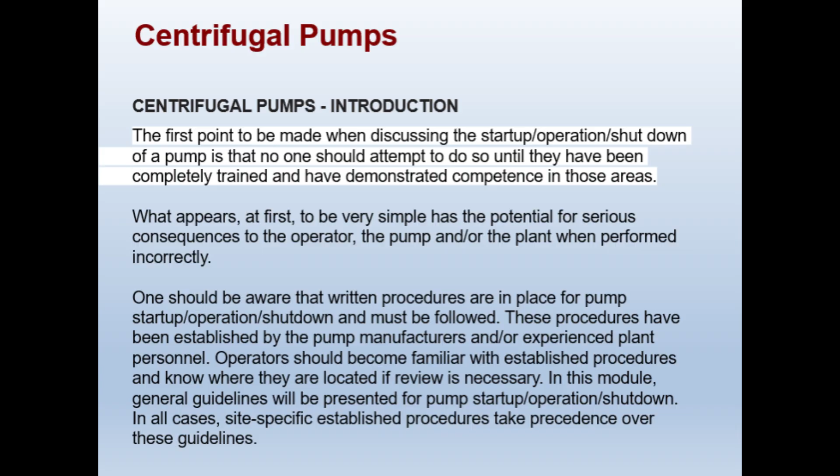Before starting any pump, an operator must understand certain aspects of its installation. Questions such as whether static suction lift exists, what liquid is being pumped, and where it is being delivered should all be answered well before startup.

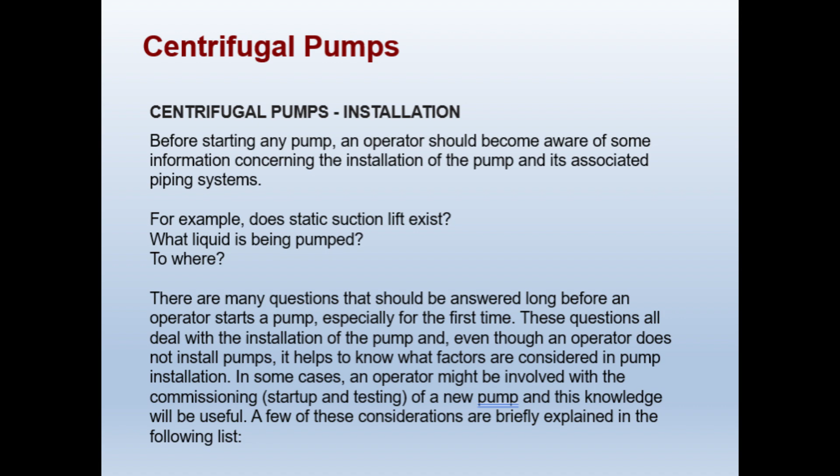Even though operators typically do not install pumps themselves, understanding the installation factors is valuable, especially if you're involved in commissioning a new pump. Let us walk through some of the key considerations that influence how a pump is installed and configured. When a new pump arrives at the plant, it undergoes careful inspection for any damage from shipping.

This is an excellent opportunity for operators to begin familiarizing themselves with the equipment. Key questions to consider include the pump's purpose and installation location, whether it is single-stage or multi-stage, whether it uses mechanical seals, and how the bearing housing is lubricated. Operators should also identify how the pump will be driven and review all nameplate information and accompanying documentation. The answers to these questions build the foundation of equipment knowledge that every competent operator needs.

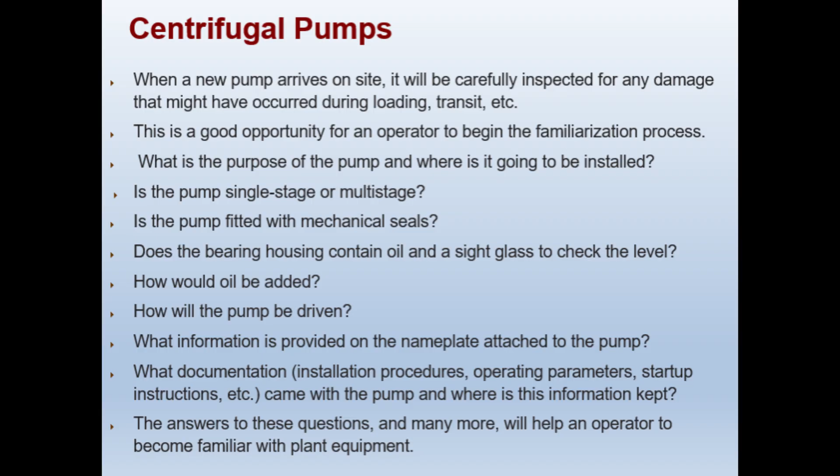During the physical installation of the pump, operators should observe as much as possible. Pay attention to how the pump is secured to its base to prevent future vibration problems. If an electric motor is being installed on site, watch the alignment process between the pump shaft and motor shaft. Note whether a flexible coupling is used to connect them. These observations help you understand the mechanical setup and will be valuable when troubleshooting issues later on.

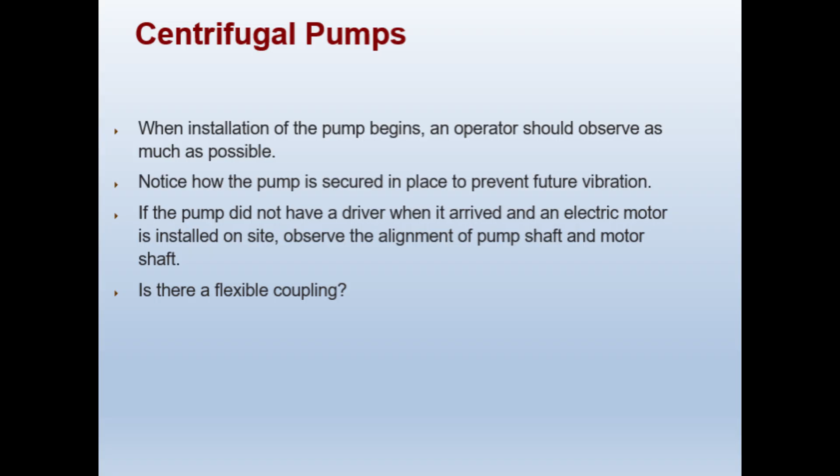Once the electrical connections are made, several important details need your attention. Look for an indication on the pump casing showing the correct rotational direction. If the motor spins the pump backwards during the initial jog test, the electrician will need to correct the wiring. Take note of the motor speed, voltage rating, and other nameplate information.

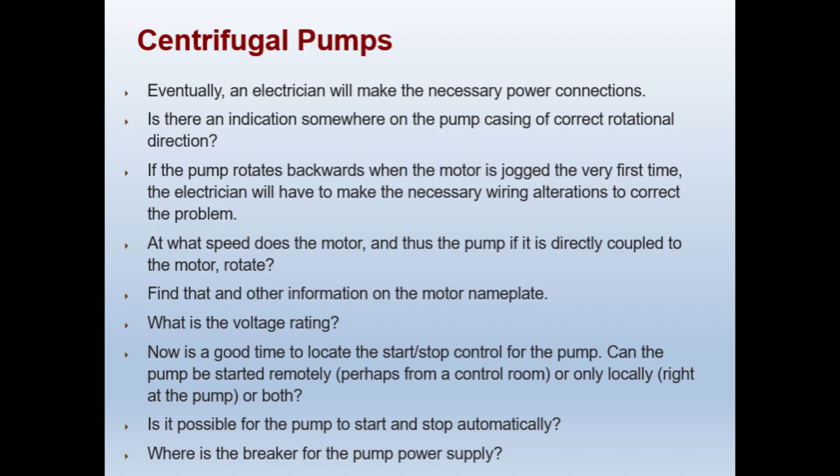Locate the start and stop controls and determine whether the pump can be started locally, remotely from a control room, or both. Also identify where the main breaker for the pump power supply is located and whether automatic start and stop capability exists. Observing the piping installation is equally important.

All connections, whether welded, screwed, or flanged, must be made without placing any strain on the pump body. The piping must be independently supported so the pump does not bear any of its weight, as this could lead to vibration, premature bearing wear, and seal damage.

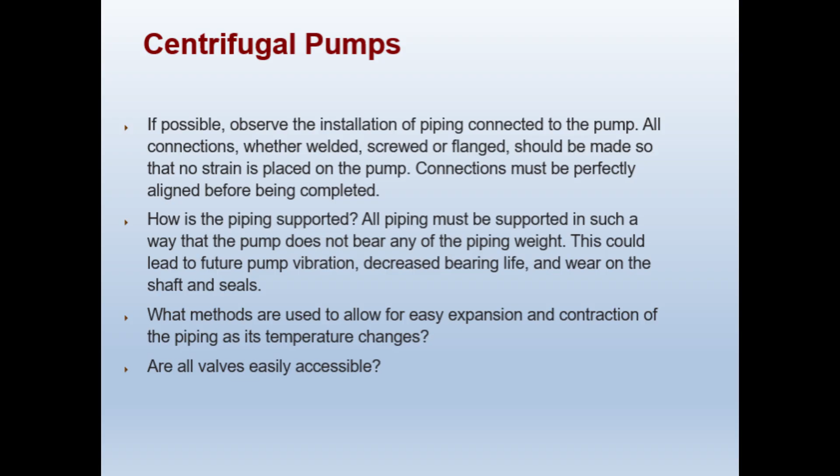Notice what methods are used to accommodate thermal expansion and contraction of the piping, and verify that all valves are easily accessible for operation and maintenance.

Now, let us look at the fittings installed in the piping system. Identify whether there is a suction valve at the pump, a valve in the discharge piping, and what types of valves are used. Are they quick opening or slow opening? Do they have rising spindles? Check for a check valve in the discharge piping and a strainer in the suction piping. Understanding all of these components is essential because they directly influence the procedures for starting, operating, and shutting down the pump.

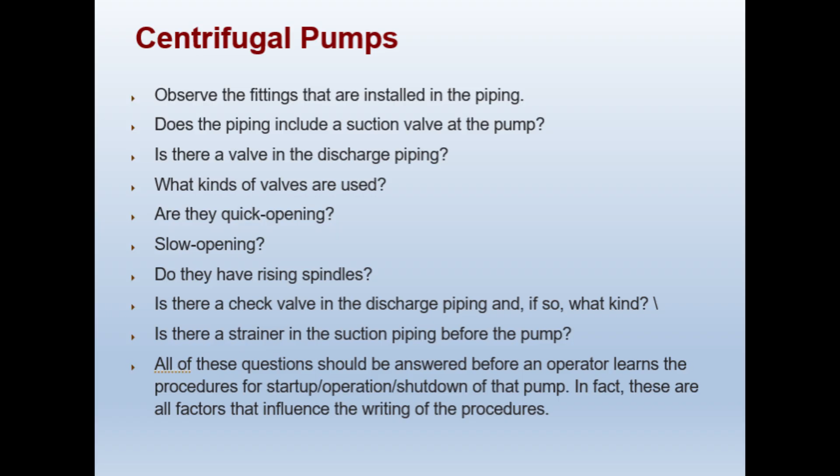Instrumentation around the pump provides critical operational data. Check for pressure gauges on both the suction and discharge sides of the pump, as well as gauges on either side of the suction strainer. A high differential pressure across the strainer indicates it is becoming plugged.

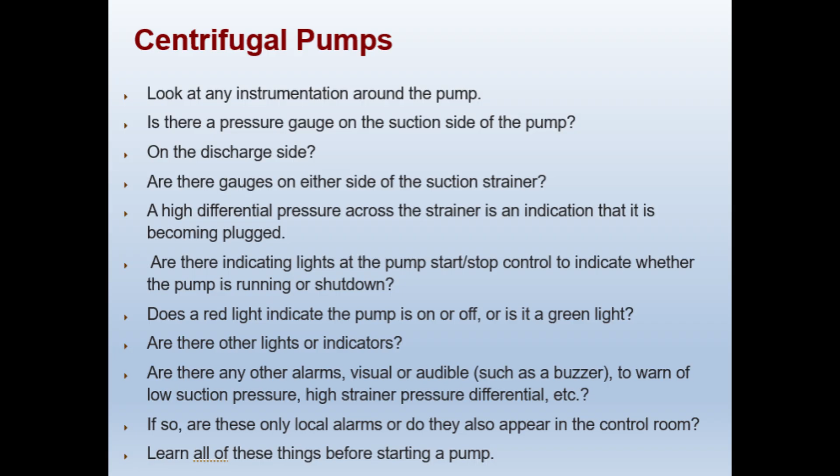Identify the indicating lights at the pump controls and learn what each color signifies. Determine whether alarms for conditions like low suction pressure are local only or also displayed in the control room. Learn all of these details before you ever start a pump. If you encounter any fittings, devices, or instrumentation that you do not recognize, make a note of them and find out what they are before operating the pump.

This knowledge could prevent serious consequences in the future. Also, if you identify any safety concerns that have not been addressed, such as a missing coupling guard, report them to your supervisor immediately. A coupling guard is a requirement, but it might have been overlooked.

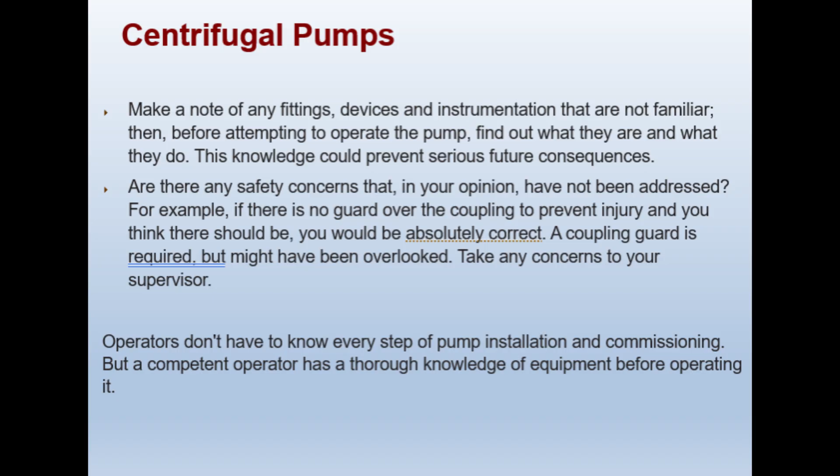Operators may not need to know every step of pump installation, but a competent operator always has thorough knowledge of equipment before operating it. Now we move into pre-startup checks.

Whether a pump has just been installed and commissioned or has been in service for years, certain checks must always be performed before starting. Never assume that any piece of equipment is ready to start without carefully inspecting it first. Because there are many variables to consider, the information presented here serves as a guideline only. There is absolutely no substitute for operator competence and adherence to plant-specific procedures.

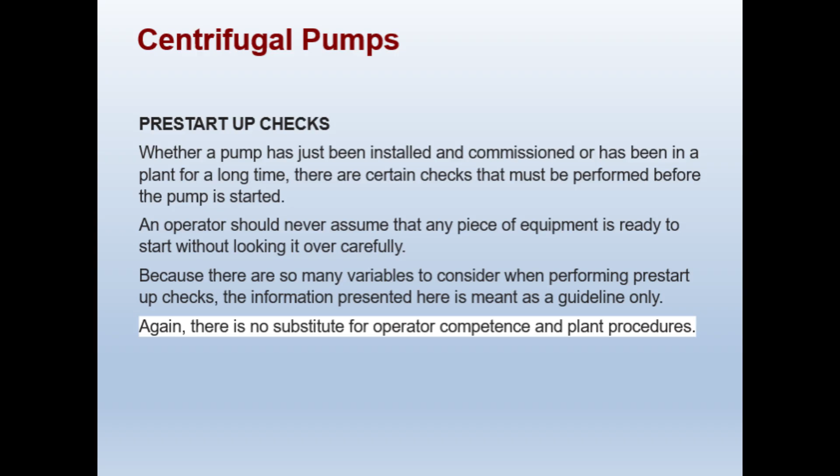The very first step of any pre-startup check is to confirm you are at the correct location. This may sound obvious, but poor communication can easily lead to serious mistakes, such as starting the wrong pump. If you are told to start P1 and there are multiple pumps with that designation, always ask for clarification.

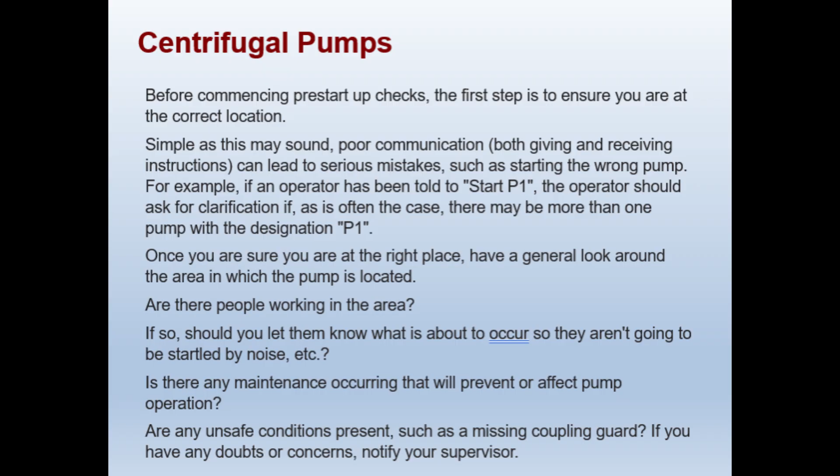Once you have confirmed you are at the right pump, survey the surrounding area. Are there people working nearby who should be notified? Is any maintenance in progress that could affect operation? Are there any unsafe conditions, such as a missing coupling guard? If you have any doubts, notify your supervisor.

Here is an example of a pre-startup procedure for a pump handling non-toxic, non-flammable liquids. First, verify that the liquid supply is available. For instance, check that the supply vessel level is above the required minimum. Never assume liquid is available.

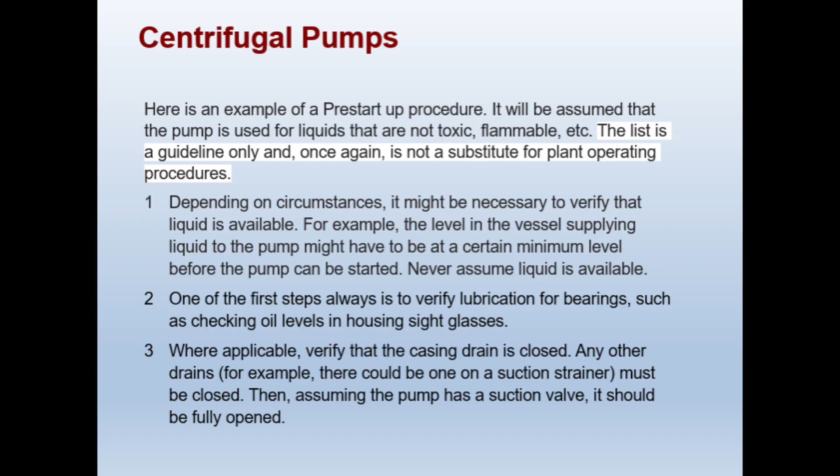Next, check bearing lubrication by verifying oil levels in the housing sight glasses. Ensure all drains are closed, including the casing drain and any strainer drains. Then, fully open the suction valve. These steps establish the basic conditions needed before the pump can be started.

It is standard practice to start a centrifugal pump with the discharge valve closed. This limits the electric current drawn by the motor at startup, which protects and prolongs the motor's life.

In our procedure, we also assume that a check valve is installed in the discharge piping immediately downstream of the pump before the discharge valve. If the discharge piping is already pressurized from other pumps feeding into the same system, the discharge valve could be opened before startup. However, for this procedure, we will start with the discharge valve closed.

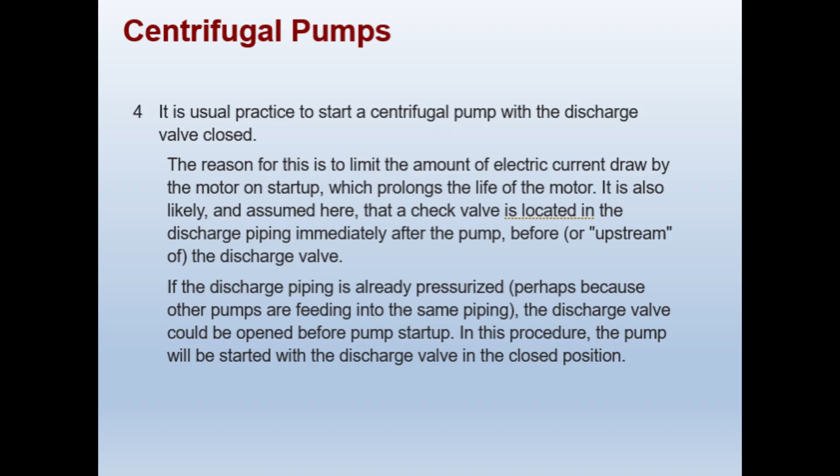Ensuring that the pump casing is full of liquid, known as priming, is critically important. Starting a pump without liquid in the casing can damage packing or mechanical seals because they depend on the pumped liquid for cooling and lubrication.

There are several methods for priming, depending on the piping configuration. When static suction head exists, as shown in the upcoming diagram, priming is accomplished by opening the vent valve at the top of the casing with the suction valve open. Liquid forces air out through the vent, and the vent valve is closed once liquid appears. Always verify that the suction pressure gauge reads normal pre-startup pressure.

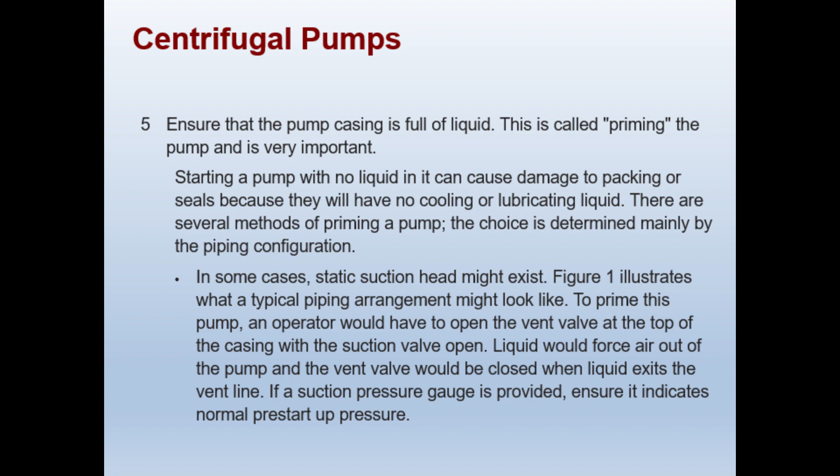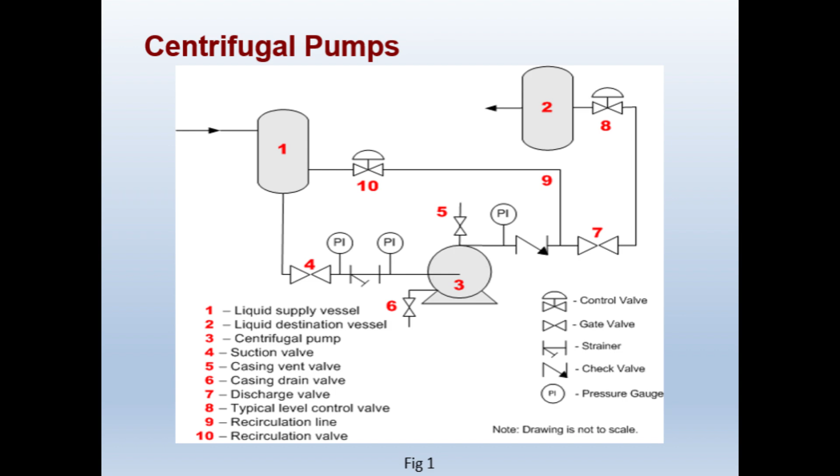Some pumps require a recirculation or minimum flow line. This piping connects the discharge side of the pump, upstream of the discharge valve, back to the liquid source. When the flow rate through the pump drops below a specified minimum, perhaps because a downstream control valve is closing, the recirculation valve opens automatically. This additional flow path prevents the pump from overheating, which would occur if low flow continued for an extended period. Understanding how this system works is vital for safe pump operation.

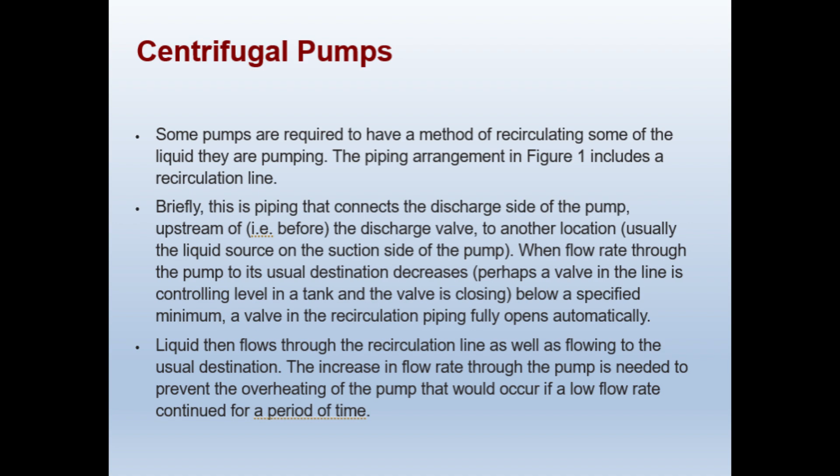To summarize the recirculation concept, it is essential to maintain a minimum flow of liquid through a centrifugal pump at all times to prevent overheating of internal components. That is why the recirculation line is often called the minimum flow line.

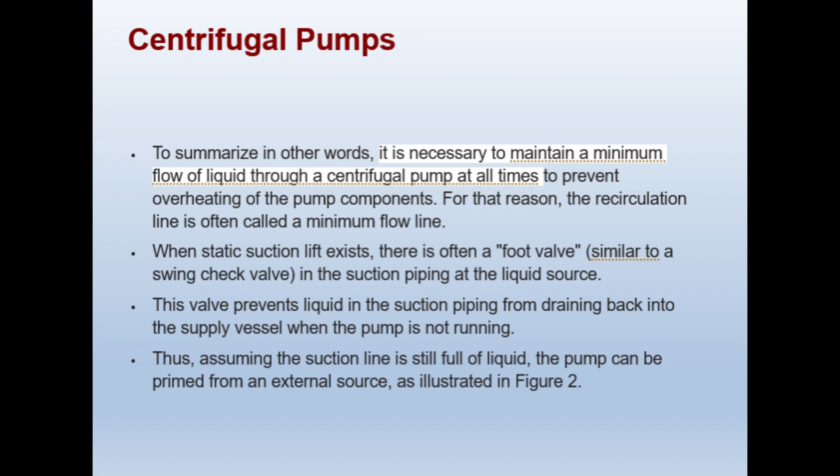Additionally, when static suction lift exists, a foot valve in the suction piping prevents liquid from draining back into the supply vessel when the pump is not running. If the suction line remains full of liquid, the pump can be primed from an external source, as we will see in the next diagram.

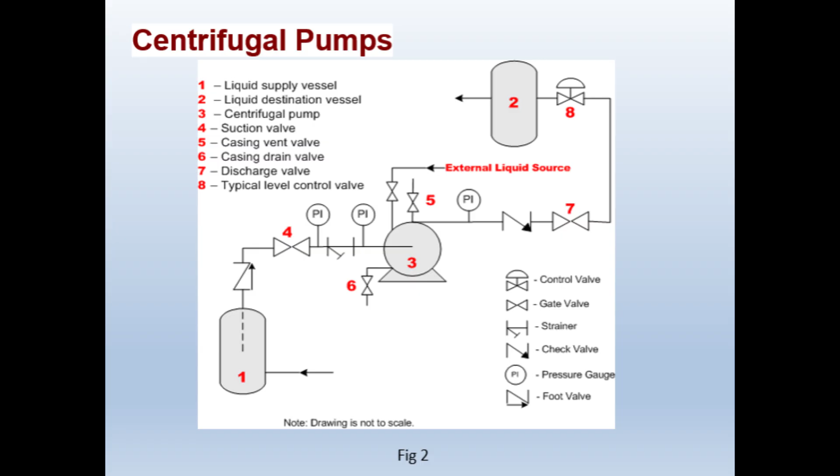This diagram shows how a pump can be primed from an external source when static suction lift exists and a foot valve is installed. The external priming source fills the pump casing with liquid, displacing the air through the vent. Once liquid exits the vent, the valve is closed and the pump is ready for startup. This method is particularly useful when the normal suction path cannot provide the initial prime on its own.

Each priming method has its place depending on the specific piping arrangement and plant configuration, and operators should be familiar with the method used for each pump they operate.

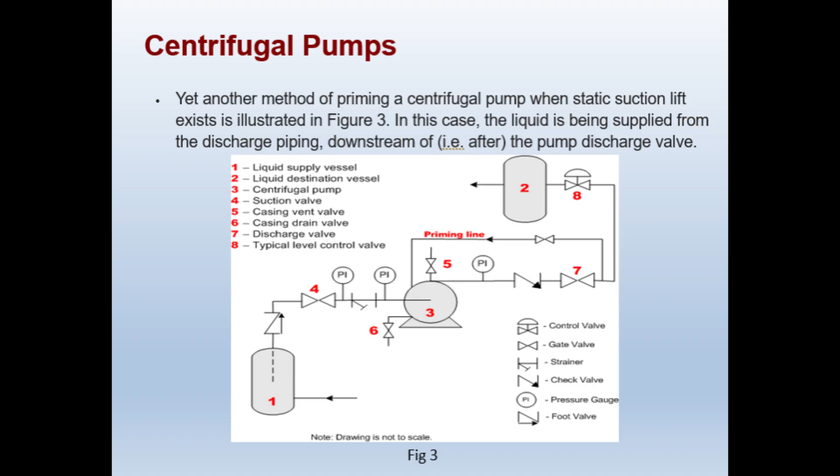A less commonly used priming method involves a small priming pump, which may even be hand-operated. This priming pump exhausts air from the casing, creating a low-pressure environment inside. When the casing pressure drops sufficiently, atmospheric pressure acting on the liquid in the supply vessel pushes liquid up into the casing. Once liquid exits the casing vent, the vent is closed, the priming pump is stopped, and the centrifugal pump can be started. The next slide illustrates this configuration.

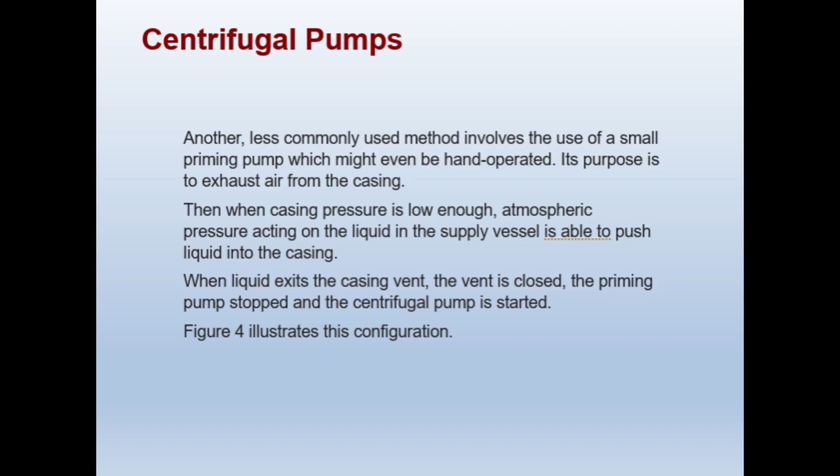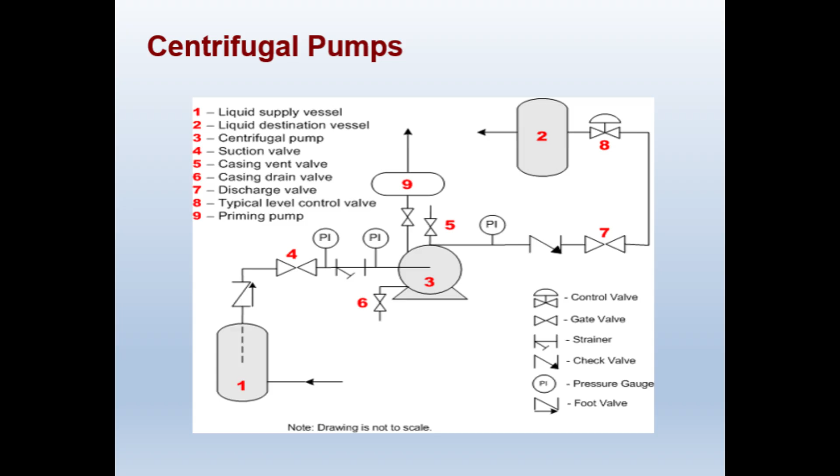Two additional pre-startup items deserve attention. First, if the pump uses an external source of liquid for packing or mechanical seal cooling and lubrication, verify that this supply is flowing before you start the pump. Running seals without their cooling liquid can cause rapid damage.

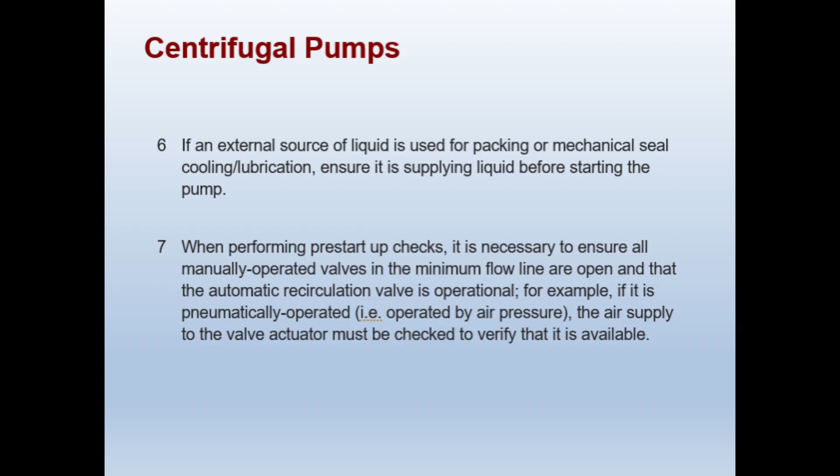Second, ensure that all manually operated valves in the minimum flow line are open and that the automatic recirculation valve is operational. If the recirculation valve is pneumatically operated, confirm that the air supply to the valve actuator is available.

Now we are ready to start the pump. When all pre-startup checks are complete, start the pump driver. If anything unusual occurs, such as severe vibration, shut the pump down immediately.

If the pump is operating satisfactorily, slowly open the discharge valve to its fully open position. Opening the valve too quickly can cause a hydraulic shock to the piping system, potentially causing damage.

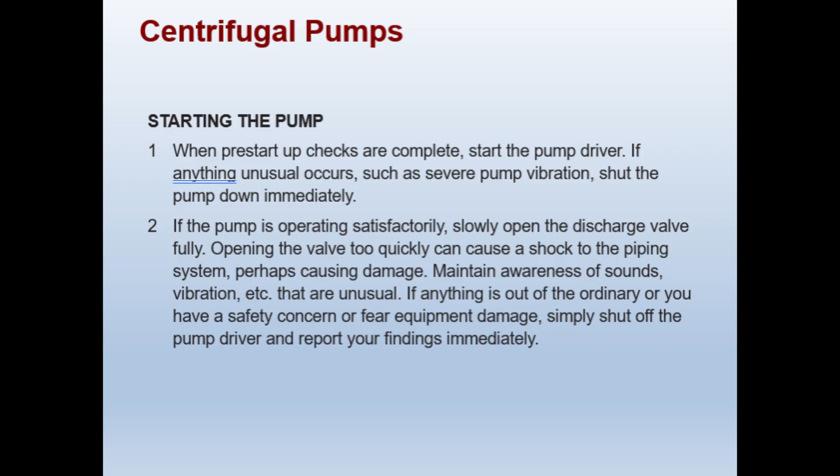Throughout this process, stay alert for any unusual sounds, vibration, or other abnormalities. If anything seems out of the ordinary or you have a safety concern, shut off the pump and report your findings immediately. After starting the pump and opening the discharge valve, observe the discharge pressure gauge and verify that it indicates normal operational pressure.

This confirms the pump is generating the expected head. Also check carefully for leaks around the pump. Keep in mind that seals, especially new ones, may leak slightly more right after startup, but this should decrease within a few minutes. If packing is used to seal the shaft rather than mechanical seals, a small amount of visible leakage is actually expected and necessary for proper packing function.

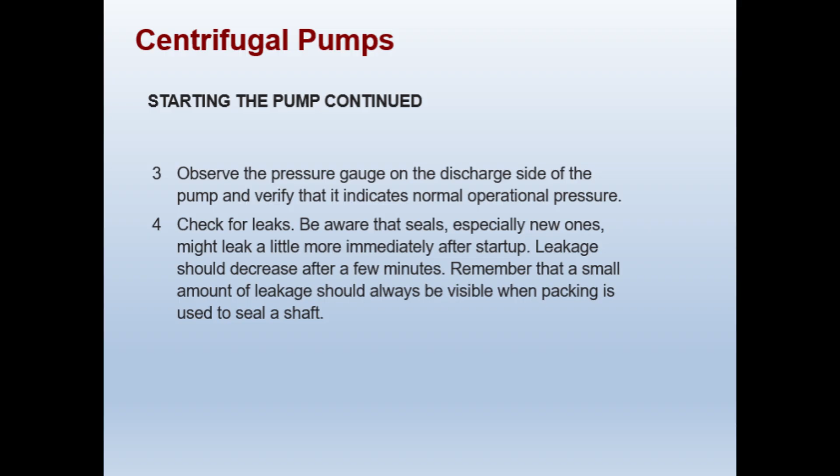Let us now discuss routine operating checks. An operator should never assume that once a pump appears to be running normally, there is no need to return and check on it. In fact, routine checks should be more frequent for pumps that have recently been placed in service. These checks are neither time-consuming nor difficult, but they must be thorough, more than simply walking past a pump to confirm it is still running.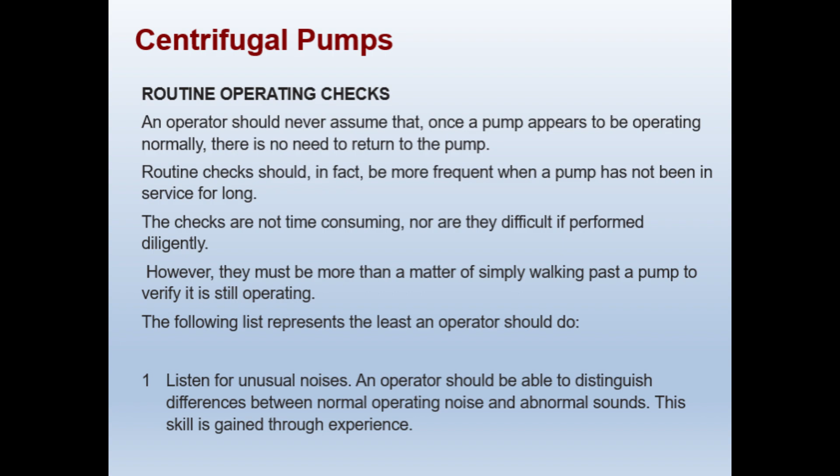At a minimum, listen for unusual noises. Experienced operators develop the ability to distinguish between normal operating sounds and abnormal ones. This skill comes with time and attention.

Continuing with routine checks, review all instrumentation associated with the pump. Is discharge pressure normal? Is suction pressure within the expected range? Check additional instruments monitoring flow rate, temperatures, strainer differential pressure, and any other relevant variables.

Remember that vibration can be transmitted from the pump through the attached piping, so unusual vibration heard at a distance may originate at the pump. Whenever possible, carefully feel the bearings to check for vibration and temperature.

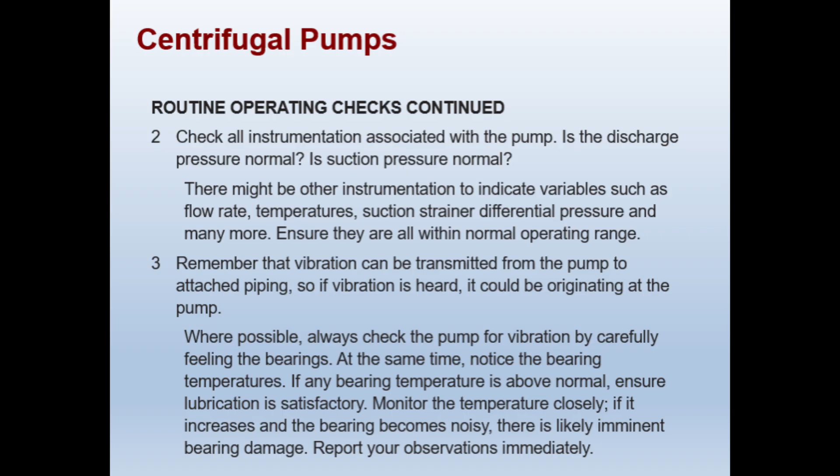If bearing temperatures are above normal, verify lubrication immediately and monitor the temperature closely. Increasing temperature combined with bearing noise likely indicates imminent bearing failure. Report this immediately.

Whether or not bearing temperatures appear elevated, always check bearing oil levels during routine rounds and add oil if necessary. Be careful not to overfill the reservoirs. For grease-lubricated bearings, follow established preventive maintenance schedules and avoid overgreasing.

Inspect packing or seals for any excessive leakage and report it promptly. Ensure all problems are addressed immediately. If maintenance paperwork is required, submit it right away. For minor tasks within your qualifications, such as tightening a loose valve handwheel nut, go ahead and take care of

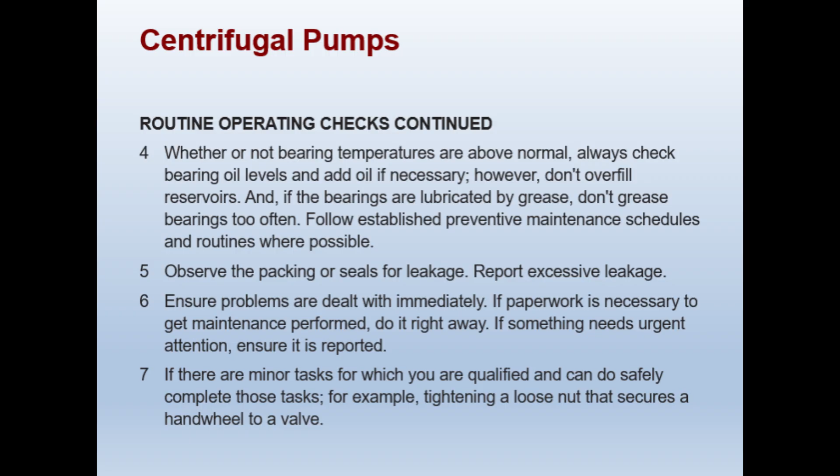them on the spot. Housekeeping is an important part of routine equipment checks. Keep the area around the pump clean and tidy, wipe up spilled oil, properly dispose of oil-soaked rags, and ensure nothing obstructs the motor cooling passages.

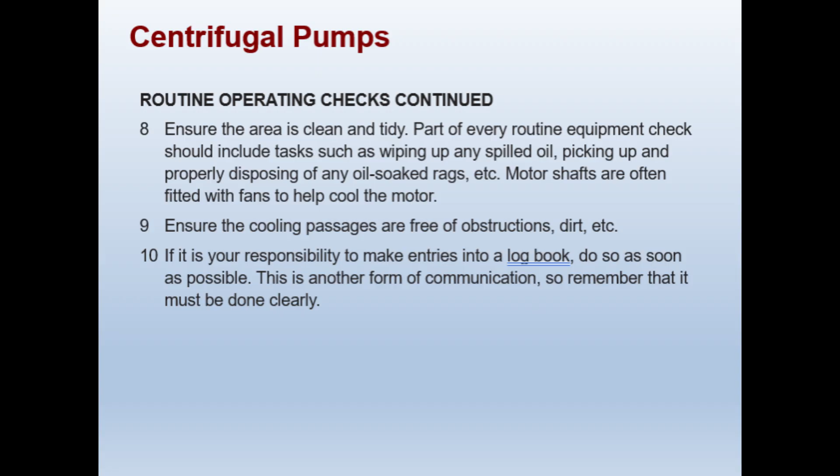Many motors have shaft-mounted cooling fans, and blocked cooling airflow can lead to motor overheating. If you are responsible for making logbook entries, do so as soon as possible after your checks. Log entries are a form of communication, so they must be clear, accurate, and timely.

An important reminder: operators should not focus exclusively on equipment that is currently running or scheduled to run. Many pieces of equipment, especially those that can be started remotely, must be maintained in a ready-to-run state at all

times for emergency situations. For standby pumps, this means keeping oil levels checked, suction valves open, casings primed where possible, and liquid supply availability confirmed, regardless of whether the pump is expected to run. Being prepared can make the difference in an emergency.

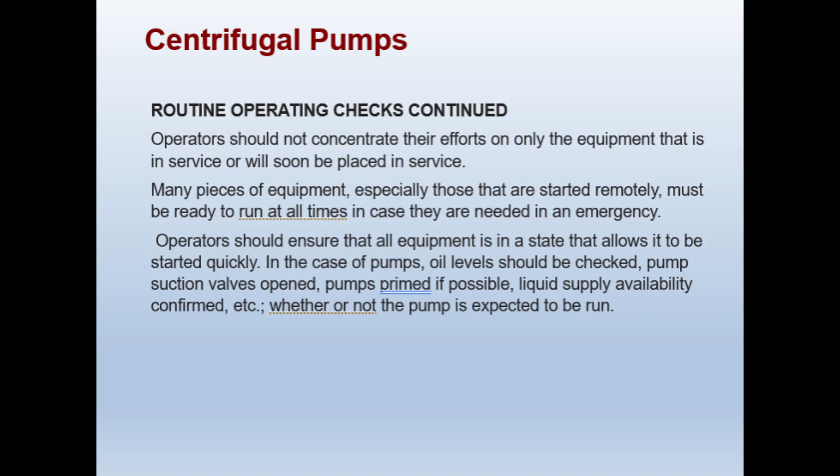Now, let us discuss how to regulate the output from centrifugal pumps. In some cases, pumps are driven by variable speed motors, and flow rate is controlled by adjusting motor speed. However, variable speed drivers are relatively uncommon and expensive.

The most common method is throttling a valve on the discharge side of the pump. For example, an automatically operated valve at the inlet of a destination vessel might control liquid level in that vessel.

One critical rule to remember: pump output must never be controlled by adjusting flow on the suction side. Doing so could starve the pump or cause cavitation, leading to serious damage. All suction side valves must remain fully open during operation.

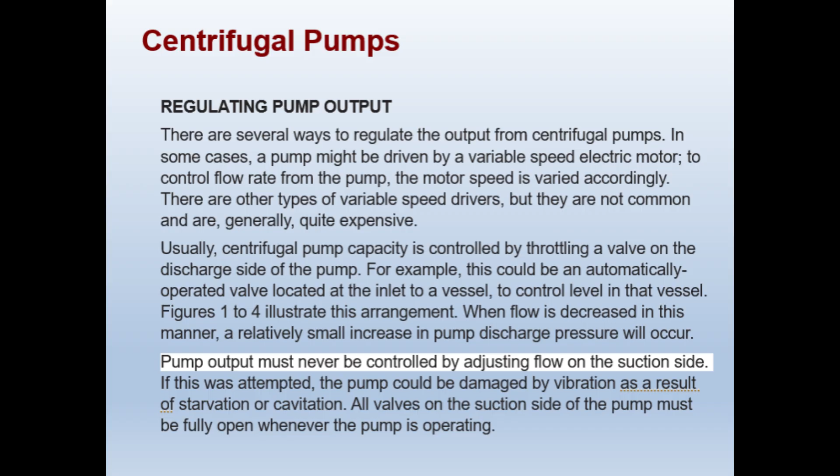When it is time to stop the pump for a relatively short period, the procedure is straightforward. For a motor-driven centrifugal pump, it is generally correct practice to close the discharge valve while the pump is still running. If the pump has a minimum flow line, liquid will continue to circulate through the pump even with the

discharge valve closed. If there is no minimum flow line, closing the discharge valve before stopping is still acceptable, provided the motor is stopped shortly thereafter.

Importantly, with the discharge valve fully closed, a centrifugal pump will not develop enough pressure to rupture the casing or piping. This applies specifically to centrifugal pumps, not all pump types.

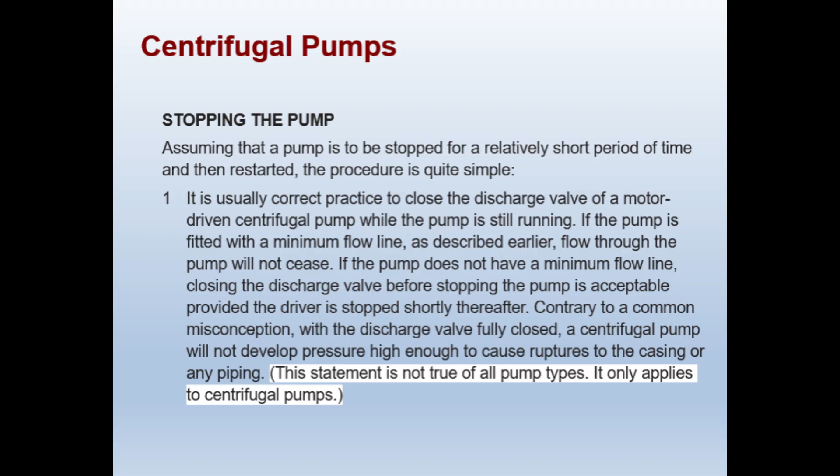After the discharge valve is closed, the pump driver can be stopped, usually by pressing a button or turning a switch at the pump. A critical safety point: never stop a motor by opening the main breaker, as this involves dangerously high voltages. Motor control circuits operate at much safer, lower voltages.

In many cases, these two steps, closing the discharge valve and stopping the driver, complete the shutdown process. Typically, the suction valve is left open and the casing is left full of liquid, keeping the pump in a state that allows it to be restarted quickly if needed.

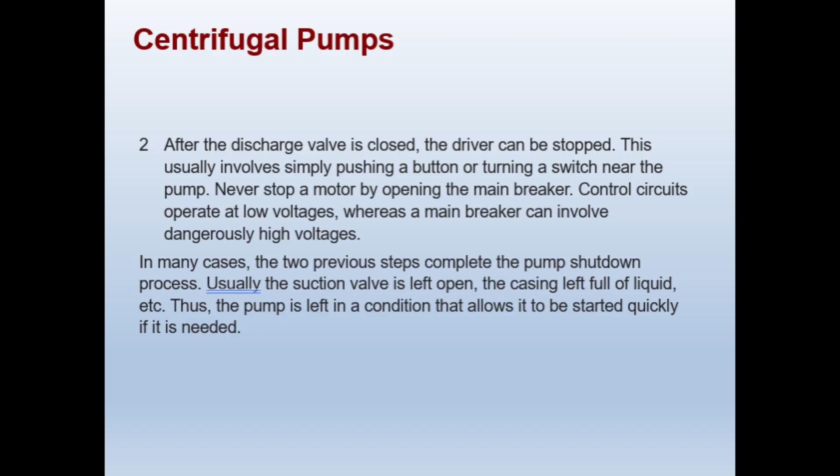Troubleshooting is a valuable skill that operators should continuously develop. Many problems arise during pump startup, operation, and shutdown. The ability to diagnose issues and implement corrections requires thorough knowledge of equipment construction and operation, combined with common sense. In the following slides, we will examine some of the most common pump problems, along with suggested remedies. In every case, we assume that the equipment was correctly commissioned and that pre-startup checks were completed properly.

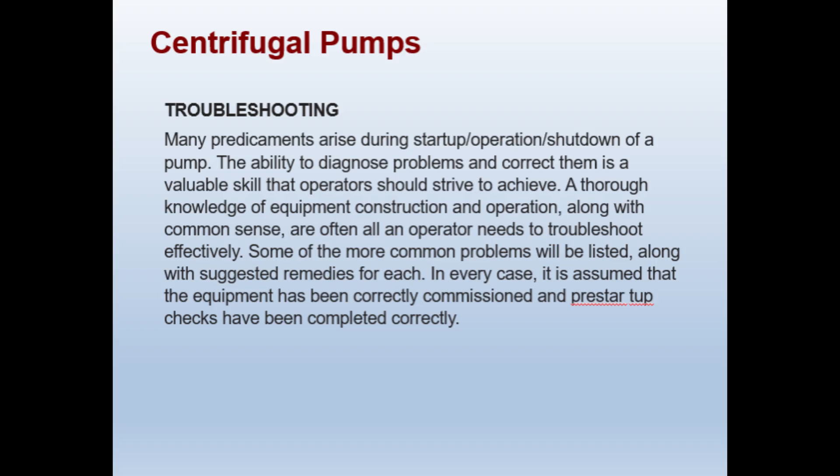If the pump will not start and it is driven by an electric motor, the most likely cause is that power is not available. First, confirm you are using the correct operating switch for that specific pump. Verify that the main breaker is closed, meaning in the on position, and check whether it is tripped. If the breaker needs resetting, do so. If power appears to be available, consider other possibilities.

Some large pumps have interlocks or permissives that prevent startup. For example, a position switch on the suction valve that requires it to be fully open, or a level switch in the supply vessel that prevents startup when liquid is too low. Operators should know all startup permissives for their pumps.

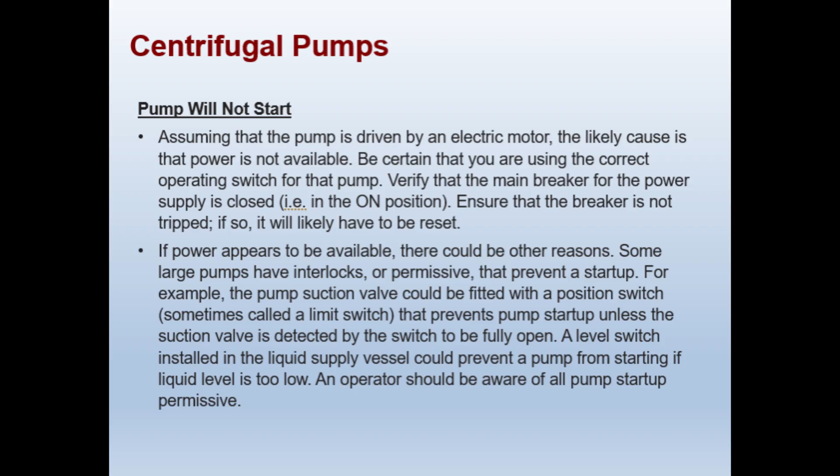If you have checked all the obvious reasons and the pump still will not start, it is time to seek assistance. A more experienced operator may be able to offer suggestions. If that does not resolve the issue, seek the help of a qualified electrician. There is no shame in asking for help. In fact, knowing when to escalate a problem is a mark of a competent operator.

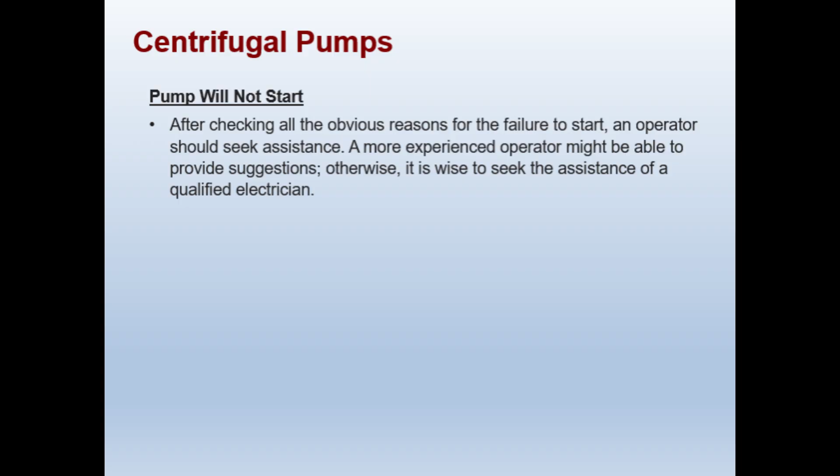When a pump starts but the motor trips immediately, meaning it shuts down automatically, the likely cause is excessive electrical current draw that could damage the motor. While resetting the breaker will allow the motor to restart, the trip will probably occur again, so it is crucial to find the root cause first.

Check for mechanical problems that might restrict free shaft movement. Look for obvious physical damage such as a bent shaft or anything tangled around the shaft, like a rag that was used to clean up spilled oil.

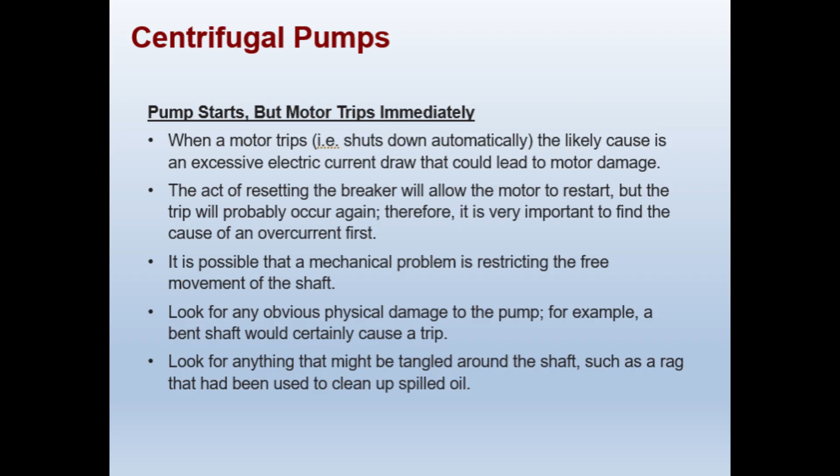Continuing with the motor trip issue, consider whether something might have been left inside the pump casing after routine maintenance. Before physically inspecting any part of the pump, always ensure the power is off for your personal safety.

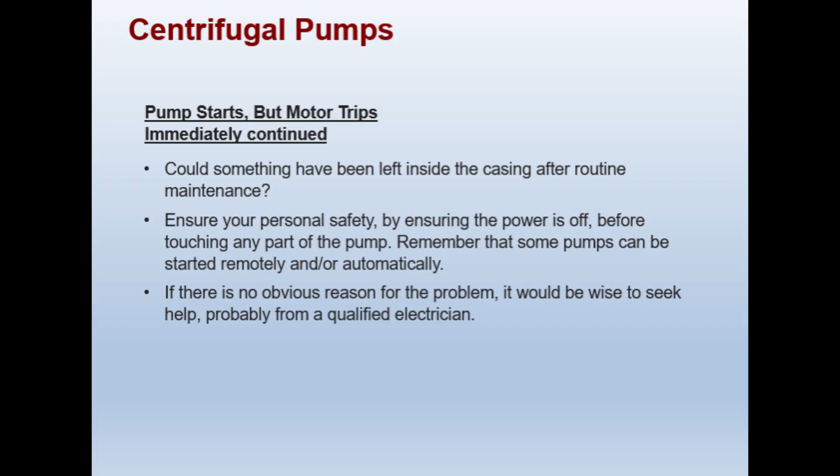Remember that some pumps can be started remotely or automatically, so simply pressing the local stop button may not be sufficient. If you cannot identify an obvious cause for the tripping, seek help from a qualified electrician rather than repeatedly resetting the breaker. If the motor trips while the pump is already running, several causes should be investigated.

Internal damage, such as a bent shaft or excessive misalignment between the motor and pump shafts, could be responsible. Another common cause is packing that is too tight, creating excessive resistance to rotation and forcing the motor to draw more current. Check for adequate leakage along the shaft. Remember, some leakage at the packing is normal and necessary.

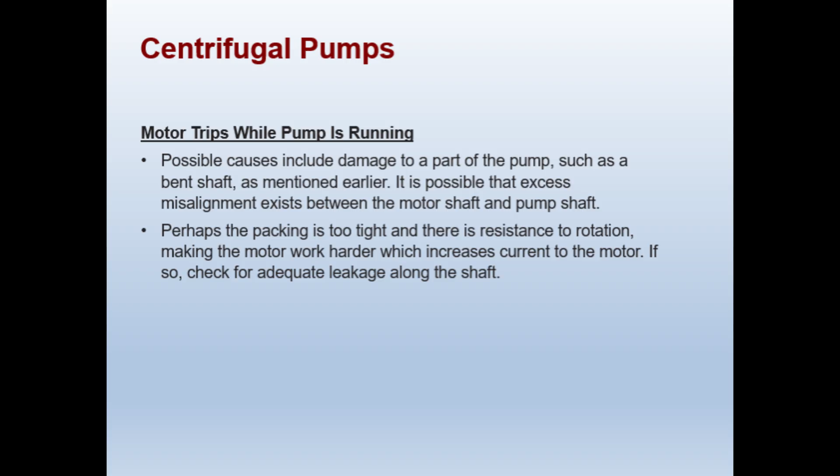Further investigating a motor trip during operation, depending on the circumstances, you may reset the breaker and restart the pump after correcting an apparent problem. However, if the motor trips again, you will need assistance from an electrician or maintenance personnel.

Another possibility to consider is that the pump is moving more liquid than intended. If liquid is flowing to the normal destination and also unnecessarily through the recirculation line due to a defective valve, the increased total flow could cause the motor to draw excessive current. Check the operation of the recirculation valve.

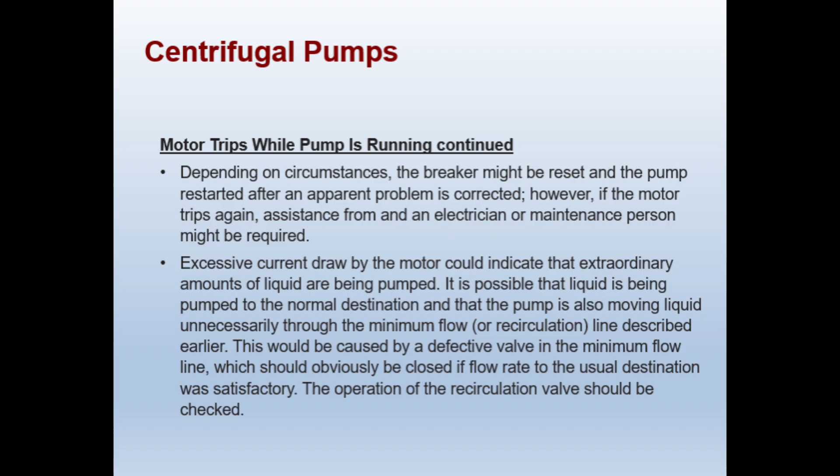Loss of prime is a serious issue that can occur both before and during pump operation. If the pump cannot maintain prime before startup and static suction lift exists, the foot valve in the suction piping is likely defective, allowing liquid to drain back into the supply vessel. A leak in the suction piping, perhaps at a flanged connection, could also be the cause.

After startup, loss of prime manifests as erratic discharge pressure and flow rate. The pump may sound noisier than usual and vibration may be present. The pump is being starved of liquid.

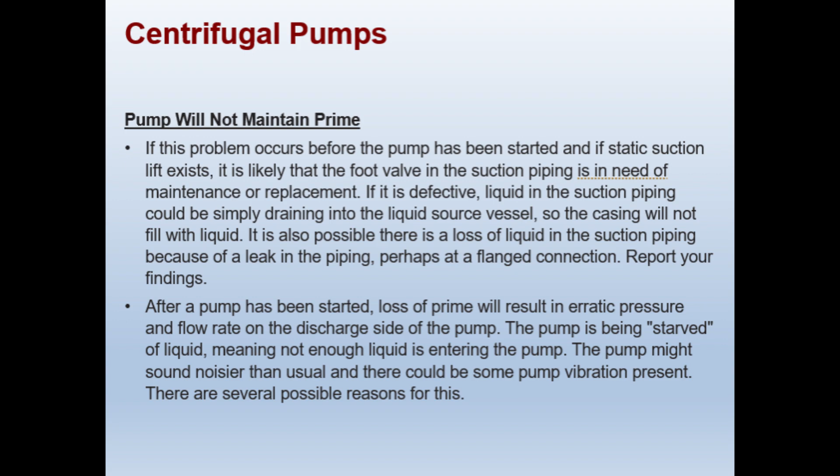When investigating loss of prime, start with the simplest explanation. The liquid supply vessel may be empty. If static suction lift exists and the vessel is not empty but the level is too low, the pump may not be capable of the required lift. Verify that the level is adequate.

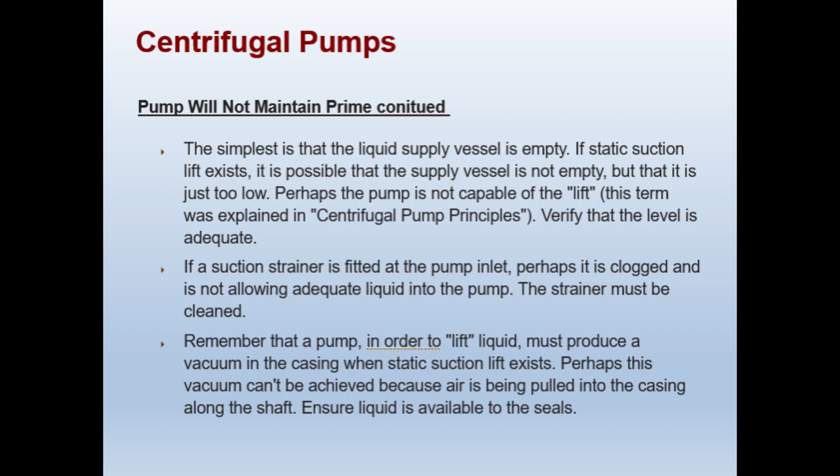A clogged suction strainer at the pump inlet could also restrict liquid flow. If that is the case, the strainer must be cleaned. Additionally, remember that the pump must create a vacuum in the casing when operating with static suction lift. If air is being drawn into the casing along the shaft, this vacuum cannot be achieved. Ensure that liquid is available to the seals. There are additional situations that can cause loss of prime.

If the liquid supply vessel contains a mixture of liquid and gas, for example water and air, the air entering the pump can cause prime to be lost. Verify that the suction piping is properly submerged in the supply vessel.

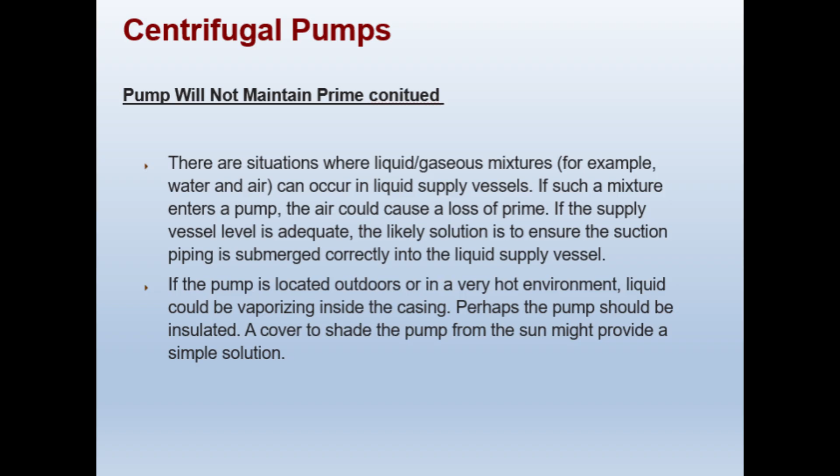Environmental factors can also play a role. If the pump is located outdoors or in a very hot environment, liquid could be vaporizing inside the casing. Solutions might include insulating the pump or providing shade to protect it from direct sunlight.

When discharge pressure is lower than normal, liquid flow rate will inevitably decrease. The problem often originates on the suction side of the pump, so check for liquid starvation using the methods we discussed earlier. If the pump uses a variable speed driver, verify that the impeller is rotating at the correct speed. A driver running too slowly will naturally produce lower pressure and reduced flow.

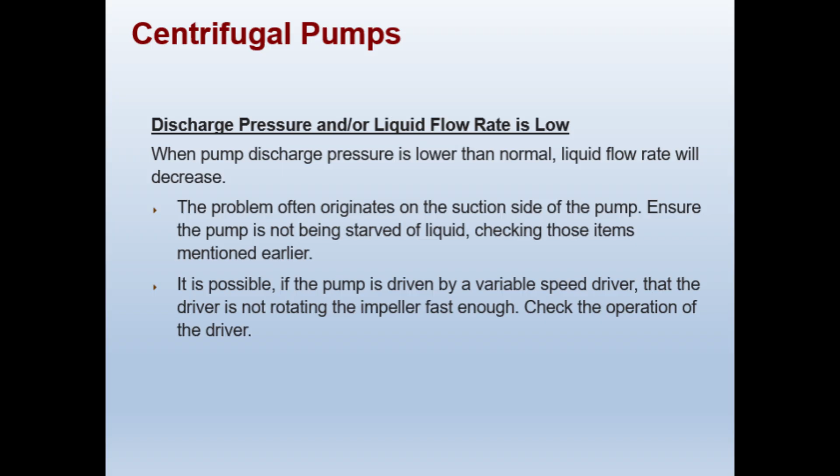Continuing with low discharge pressure, consider whether conditions at the destination vessel have changed. If the pressure in that vessel has increased, flow rate will decrease due to the increased head the pump must work against. If this pressure increase is abnormal, the problem lies downstream, not with the pump.

There is also the possibility of internal component damage. Repeated or prolonged cavitation can cause severe impeller damage, and worn wear rings can allow liquid to leak from the high-pressure area back to the impeller inlet, reducing output. Only an internal inspection can confirm these issues.

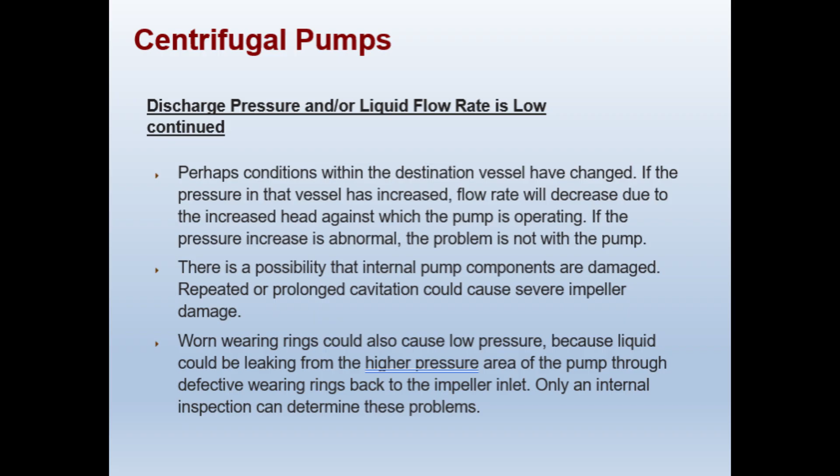When bearing temperatures begin to rise above normal, act immediately because the problem can escalate very quickly. Start by verifying that bearing lubrication is satisfactory. Check oil levels in the bearing housings.

Larger bearing housings may have internal cooling water coils. If so, verify cooling water flow and oil temperature. Check whether water has leaked into the lubricating oil or if the oil has been contaminated with any foreign matter. Pump vibration can also drive bearing temperature increases, so investigate and address any vibration issues as well.

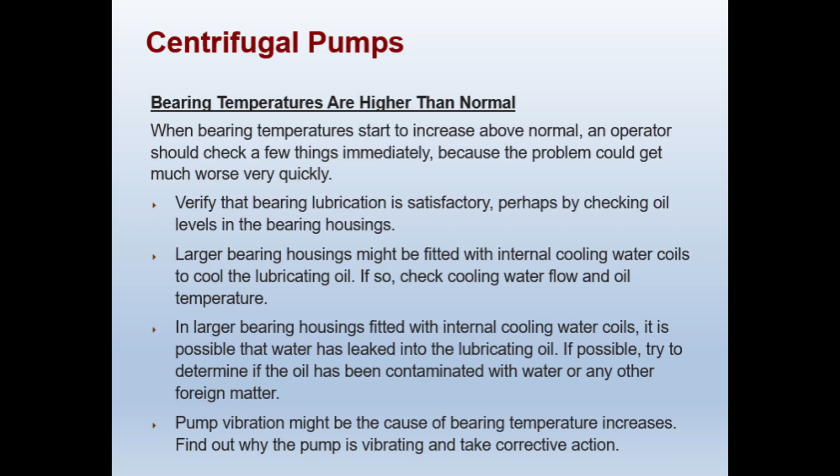Excessive noise and vibration require immediate operator action. Several common causes include damaged pump bearings. If bearing temperature has been climbing and vibration was already detected, the situation has worsened and the pump must be taken out of service for repair.

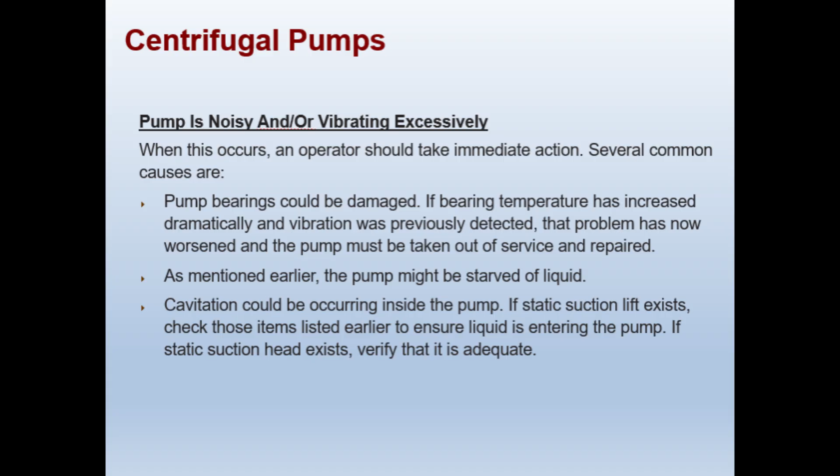The pump could be starved of liquid, as we discussed earlier. Cavitation may be occurring inside the pump. If static suction lift exists, verify that liquid is properly entering the pump. If static suction head exists, confirm that it is adequate for the pump's requirements.

Before concluding that the vibration originates within the pump itself, check external factors. An insecurely anchored baseplate can cause vibration from pump or piping movement. Check the baseplate bolts and verify all piping is secure and not placing unnecessary weight on the pump.

Misalignment between the pump shaft and driver shaft is another common cause that may be detectable through careful observation. Internal mechanical damage, such as a bent shaft or worn impeller, will require an internal inspection to confirm.

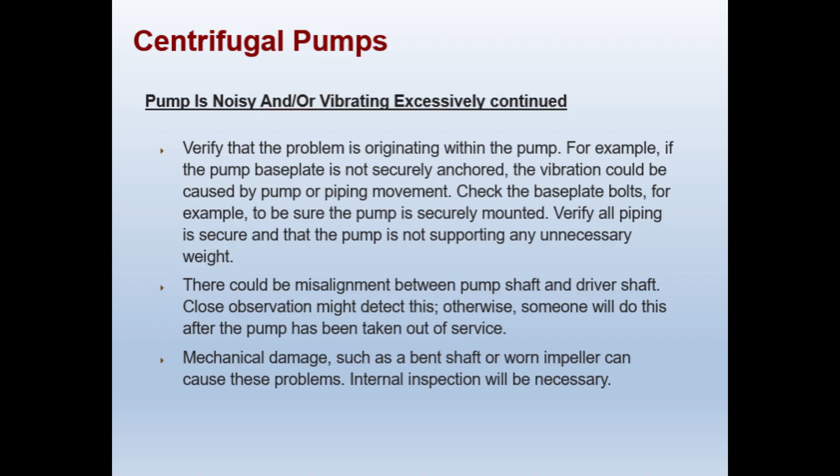Two more causes of excessive noise and vibration to consider. If there is no strainer at the pump inlet, a foreign object may be attempting to enter the casing. A large object will cause erratic discharge pressure and flow along with noticeable noise and vibration. The pump must be shut down for internal inspection.

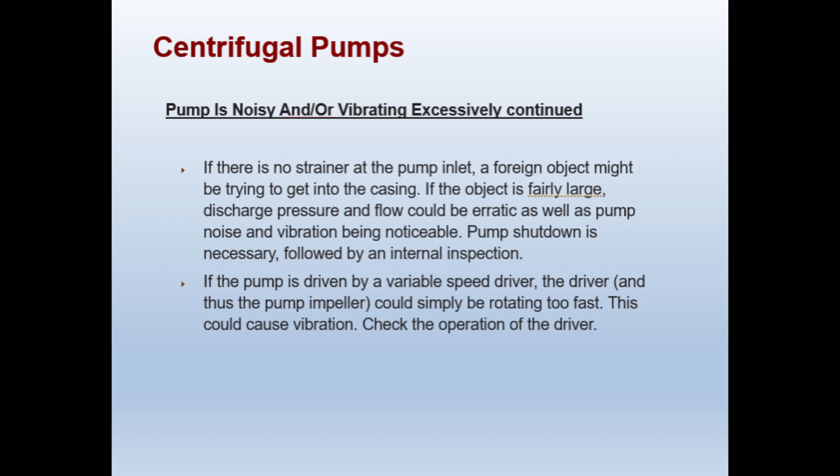Additionally, if the pump uses a variable speed driver, the impeller could simply be rotating too fast, causing vibration. Check the driver operation and speed settings.

If the pump temperature is significantly higher than normal but no other symptoms like vibration are present, the most likely cause is insufficient liquid flow through the pump. Check whether flow to the destination vessel is low and verify that the recirculation valve is open to maintain minimum flow, as we discussed earlier. Also consider whether the pump needs protection from external heat sources, such as direct sunlight.

As with all plant equipment, when you are uncertain about a situation, always ask for assistance rather than guessing.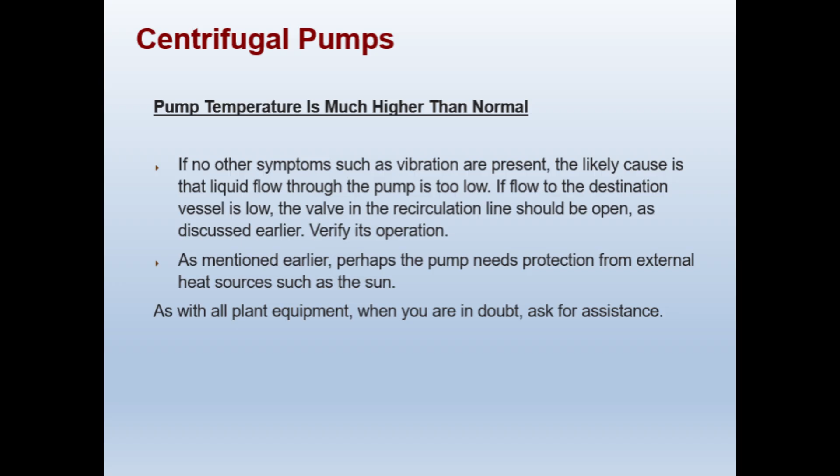This concludes our training module on the operation of centrifugal pumps. We have covered the complete life cycle of pump operation, from installation awareness and pre-startup checks, through starting procedures and routine operating checks, to regulating output, shutdown procedures, and troubleshooting common problems.

Remember, the most important takeaways are: always follow established plant procedures, never operate equipment you have not been trained on, and never hesitate to seek assistance when something seems wrong. Thank you for completing this module, and stay safe in your operations.